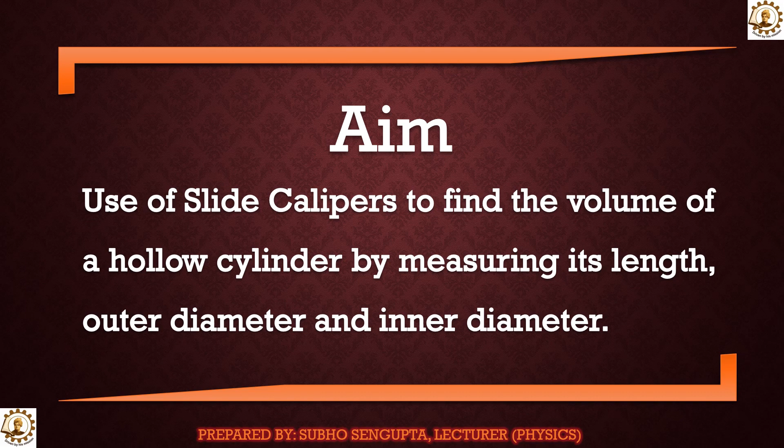First of all, let us discuss what is the aim of this experiment. In this experiment, we will use slide calipers or a vernier calipers to determine the volume of a given hollow cylinder by measuring its length, outer diameter and inner diameter. Before starting the experiment, first I will describe what is a slide calipers or a vernier calipers.

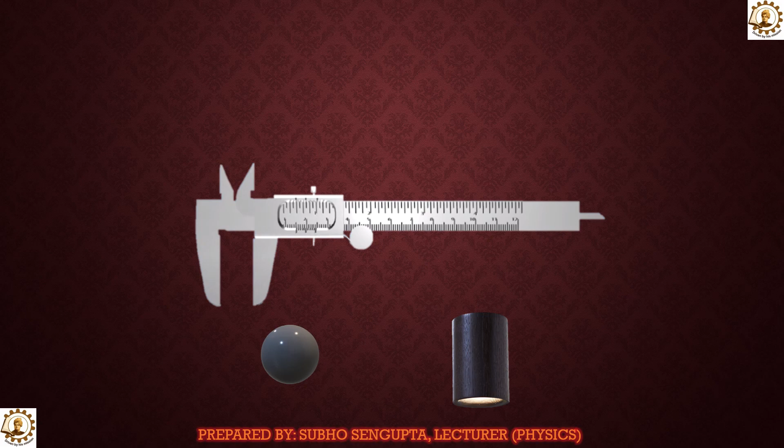Vernier calipers or slide calipers is an instrument which is commonly used in physics laboratories to measure small lengths such as diameter of a sphere, length of a cylinder, the outer diameter and the inner diameter of a cylinder, etc. accurately, which could not have been possible by using a meter scale.

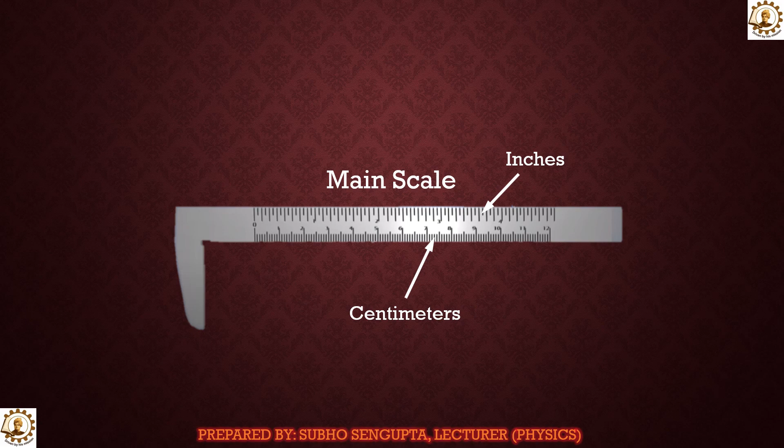A slide calipers or a vernier calipers consists of a long rectangular metal strip. This long rectangular metal strip has a fixed jaw at its one end. The metal strip has graduations on it. It is graduated in inches in its upper edge and in centimeters in its lower edge. This is known as the main scale of the vernier calipers or slide calipers.

There is a movable rectangular metal strip. This movable rectangular metal strip has also graduations on it. The graduations on the movable rectangular metal strip have a special relation with the graduations found on the main scale. This movable rectangular metal strip is known as the vernier scale. This vernier scale can slide over the long rectangular metal strip.

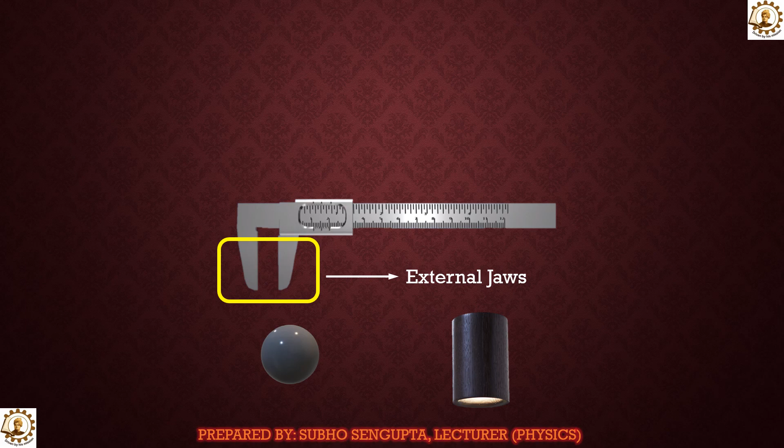This movable rectangular metal strip has a jaw similar to that of the main scale. These jaws together are used to hold objects like sphere, cylinder, etc. firmly while measuring their lengths, diameters, etc. These jaws are known as the external jaws or the lower jaws. These jaws are extended to the other side and are known as the upper jaws or the internal jaws. These jaws are generally used to measure the internal diameter of a hollow cylinder.

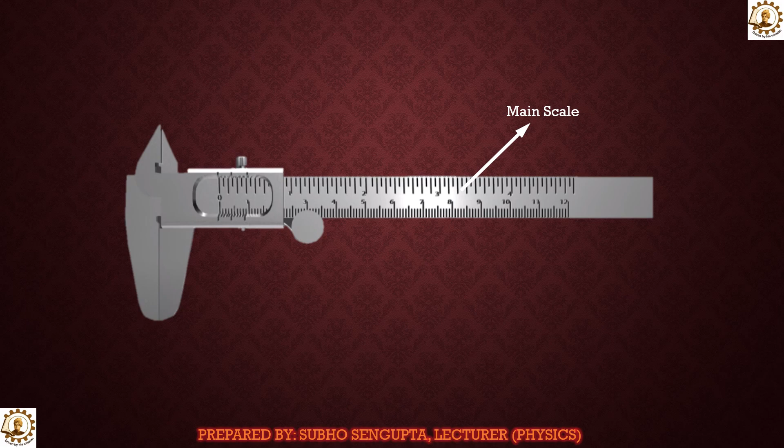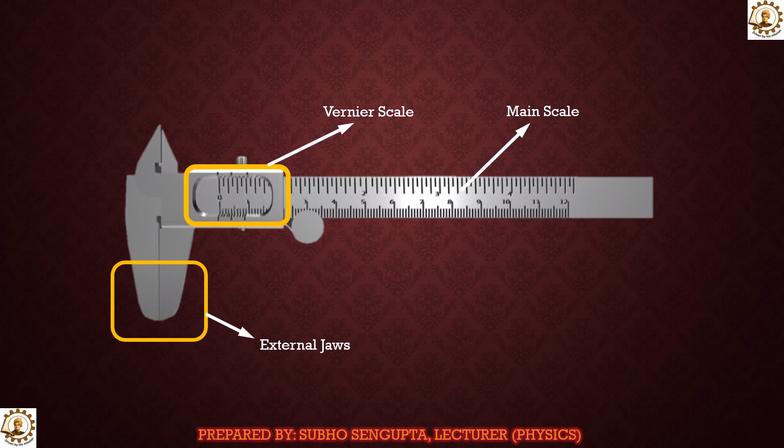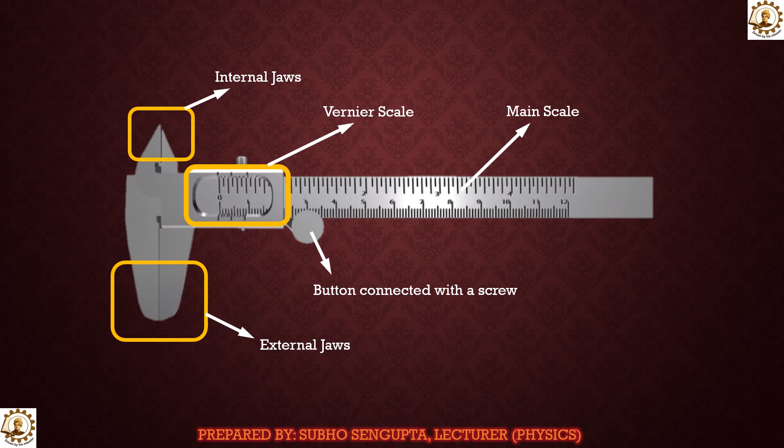So, the main parts of a vernier calipers or slide calipers are as follows. The main scale, it is graduated both in centimeters and in inches. Vernier scale, it is graduated with a special relation to that of the main scale. The external jaws or the lower jaws, the internal jaws or the upper jaws, and a button connected with a screw. By using this button, we can slide the vernier scale over the main scale of the vernier calipers or slide calipers.

Now we will discuss about the principle of a slide calipers or a vernier calipers. Remember, this instrument works on a simple principle known as the vernier principle. To discuss about the principle, first we need to determine the vernier constant or least count of the given slide calipers or vernier calipers. First, we will close the two external jaws of the slide calipers or vernier calipers by using that button.

When two external jaws of the given vernier calipers are closed, you will see that 0 of the main scale coincides with the 0 of the vernier scale. This means that when the two external jaws are closed, you will find that 10 divisions of the vernier scale are exactly equal to 9 divisions of the main scale. That is, n divisions of the vernier scale are equal to n minus 1 divisions of the main scale.

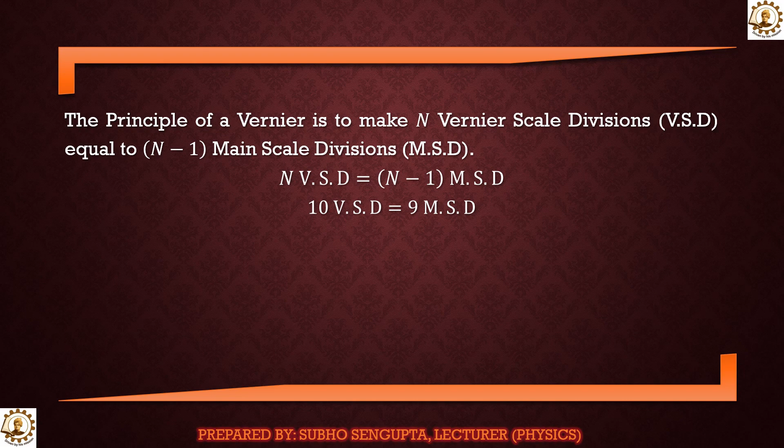The principle of a vernier is to make n vernier scale divisions or VSD equal to n minus 1 main scale divisions or MSD. Thus, n VSD = (n - 1) MSD. Here, capital N represents number of divisions. You know that there are 10 divisions on a vernier scale. Therefore, we can write 10 vernier scale divisions equal to 9 main scale divisions. Hence, 1 vernier scale division is equal to 9/10 main scale division, that is 0.9 main scale division.

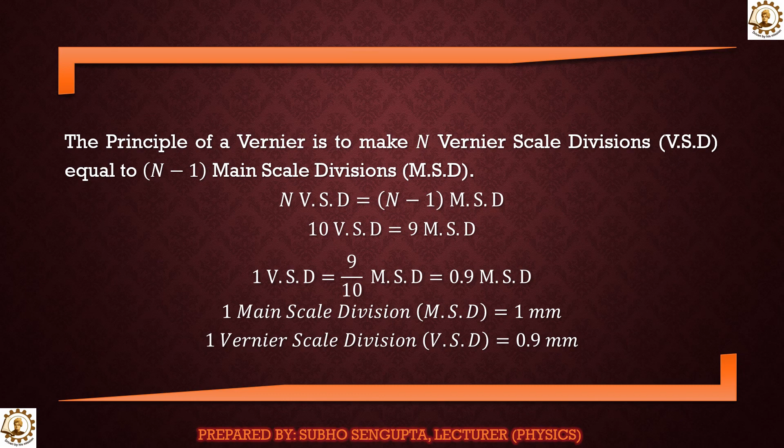Let us now consider our previous calculation. We found that one vernier scale division is equal to 0.9 main scale divisions. Now we know that one main scale division or MSD is equal to 1 millimeter. Hence, one vernier scale division or VSD should be exactly equal to 0.9 millimeters. Now we will define what is vernier constant or least count of a vernier calipers.

Remember, the smallest division that can be measured by the use of a vernier scale along with the main scale is known as the vernier constant or least count of the vernier calipers. Now, if we want to find out the value of vernier constant or least count, we need to find out the difference between one main scale division and one vernier scale division. This difference will be the vernier constant or least count of the vernier calipers. Therefore, vernier constant or least count = 1 MSD - 1 VSD.

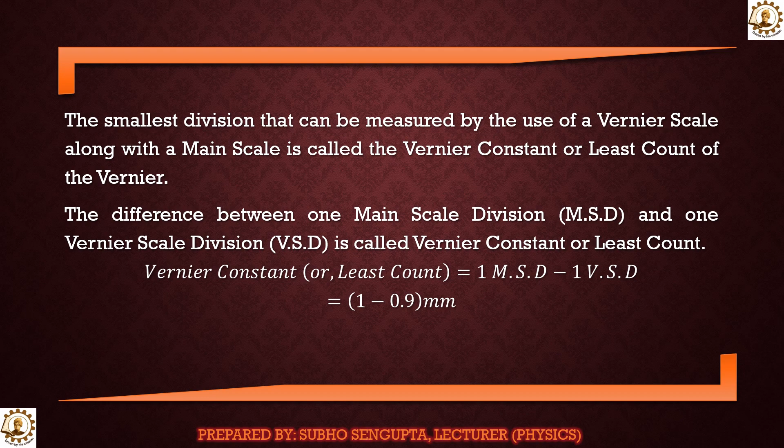We know that one main scale division is equal to 1 millimeter and one vernier scale division is equal to 0.9 millimeter. So, vernier constant or least count is equal to 1 - 0.9 millimeters, that is, it is equal to 0.1 millimeter. Now, if you divide 0.1 by 10, then the vernier constant or least count will become 0.01 centimeters.

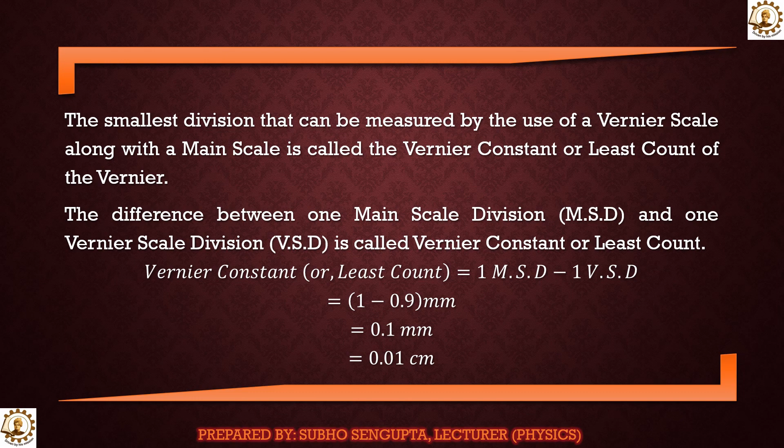Zero error. While calculating the vernier constant or least count, it was found that when the two external jaws of the vernier calipers were closed, zero of the main scale exactly coincided with the zero of the vernier scale. But there will be some situations when you will find that the zero of the main scale is not coinciding with the zero of the vernier scale, though the external jaws of the vernier calipers are closed. In those situations, you will have zero error.

Remember, we can classify zero error into two categories: one, positive zero error, two, negative zero error. Remember, zero error occurs in the instrument due to excessive wear and tear and also due to the manufacturing defect. In those situations, zero of the vernier scale does not coincide with zero of the main scale. It is either right or left of the zero of the main scale.

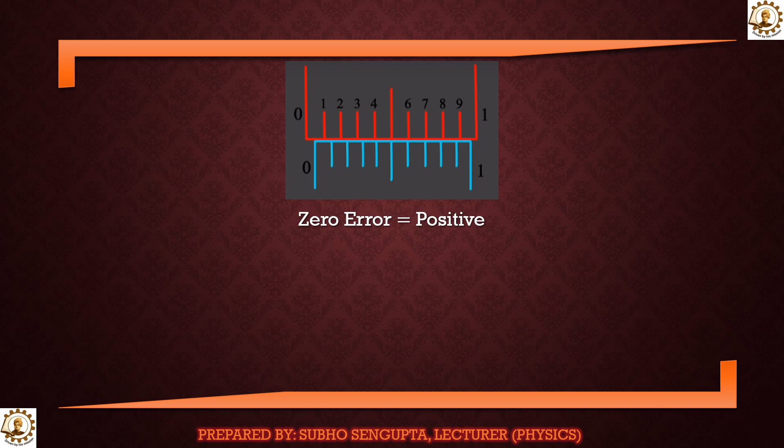First, we will consider zero of the vernier scale is right of the zero of the main scale. Here, though the two external jaws of the vernier calipers are closed, still it is measuring some extra length. That is, the vernier calipers is providing some extra reading. So we need to subtract this extra reading from the total reading when we use the vernier calipers. Remember, when zero of the vernier scale is right of the zero of the main scale, the zero error will be taken as positive and the zero correction will be negative.

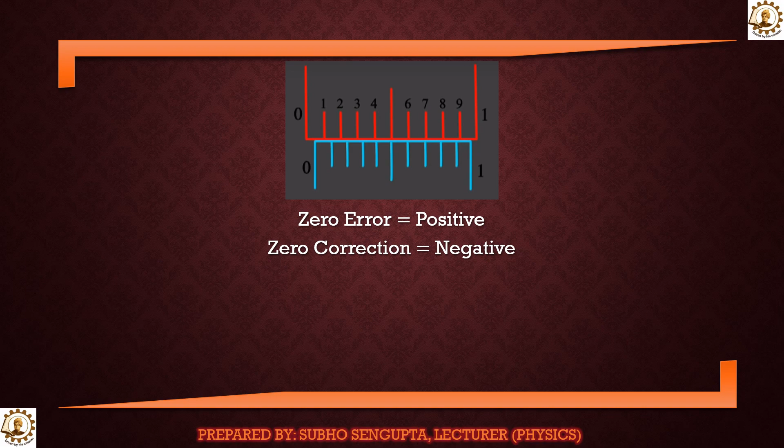Now, zero error can be calculated from the following equation, where zero error is equal to main scale reading plus vernier constant into vernier coincidence. Now, we need to know what is vernier coincidence. Since 0 of the vernier scale is not coinciding with 0 of the main scale, you will find that one of the divisions of the vernier scale will exactly coincide with one of the divisions of the main scale. We need to find out which division of the vernier scale is exactly coinciding with any of the divisions of the main scale. You need not consider with which division of the main scale that vernier division is coinciding. You need to only consider which division of the vernier scale apart from 0 is exactly coinciding with any of the divisions of the main scale.

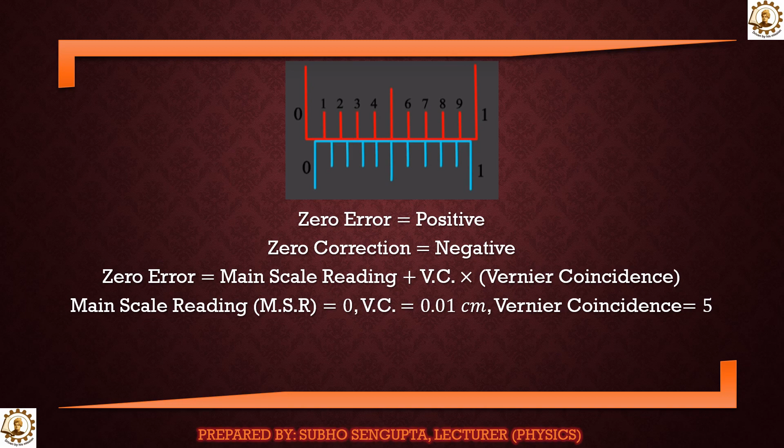From this figure, we find that main scale reading is 0. We know that vernier constant is 0.01 centimeter, and here the fifth division of the vernier scale is coinciding with one division of the main scale. Hence, the vernier coincidence for this particular diagram is equal to 5. Now, if we substitute all these values in the equation of zero error, we will find that zero error is equal to 0 plus 0.01 into 5, which is equal to plus 0.05 centimeter. So, zero error is equal to positive 0.05 centimeter. So, we need to subtract this extra reading from the total reading. Hence, zero correction for this particular case is equal to negative 0.05 centimeter.

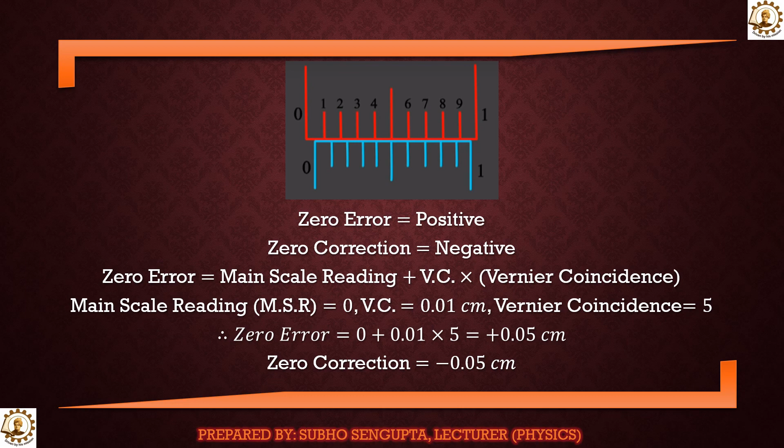Now, we will consider a situation where 0 of the vernier scale is left of the 0 of the main scale when the two external jaws of the vernier calipers are closed. In this situation, the instrument is measuring a certain less amount of reading than the original one. So, we need to add this amount of less reading to the total reading to get the actual reading. So, remember, when 0 of the vernier scale is left of the 0 of the main scale, the zero error will be negative and the corresponding zero correction is positive. Now, when the zero error is negative, the calculation is slightly different with respect to the calculation we have done when we calculated the positive zero error.

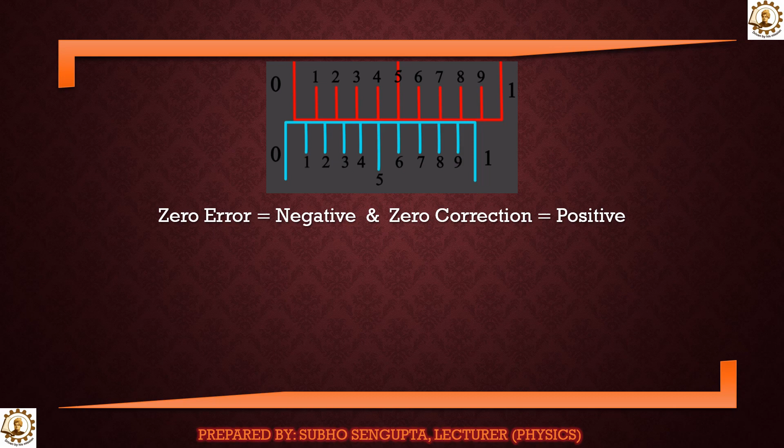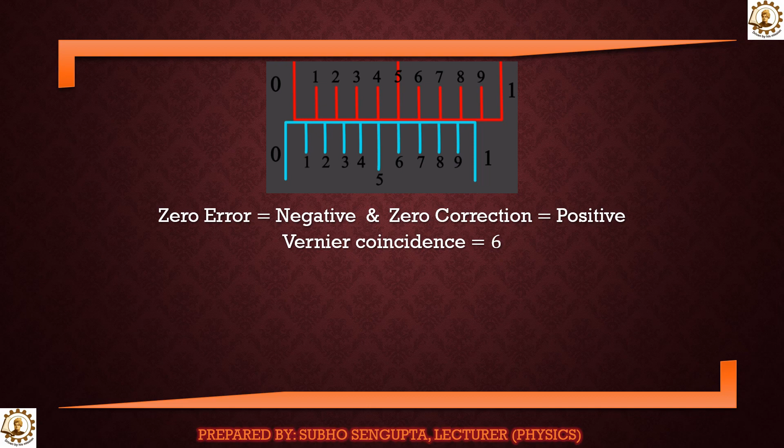Here again, we will find out which division of the vernier scale is coinciding with any of the divisions of the main scale. From the figure, you can see that the sixth division of the vernier scale is exactly coinciding with one of the divisions of the main scale. So, for this particular diagram, the vernier coincidence is equal to 6. Now, we will calculate the number of divisions for zero error. It can be calculated by subtracting this vernier coincidence from the total number of vernier divisions. So, number of divisions for zero error is equal to total vernier divisions minus vernier coincidence. We know that there are 10 divisions on the vernier scale, and from this figure the vernier coincidence is equal to 6. Therefore, number of divisions for zero error is equal to 10 minus 6, which is equal to 4.

Therefore, zero error is equal to negative of number of divisions for zero error multiplied by vernier constant. We know that number of divisions for zero error is 4 and the vernier constant is 0.01 centimeter. Hence, the zero error becomes negative of 4 into 0.01, that is, zero error is equal to negative 0.04 centimeter. Therefore, the zero correction is equal to positive 0.04 centimeter. So, we need to add 0.04 centimeter to the total reading to get the actual reading when we use the vernier calipers.

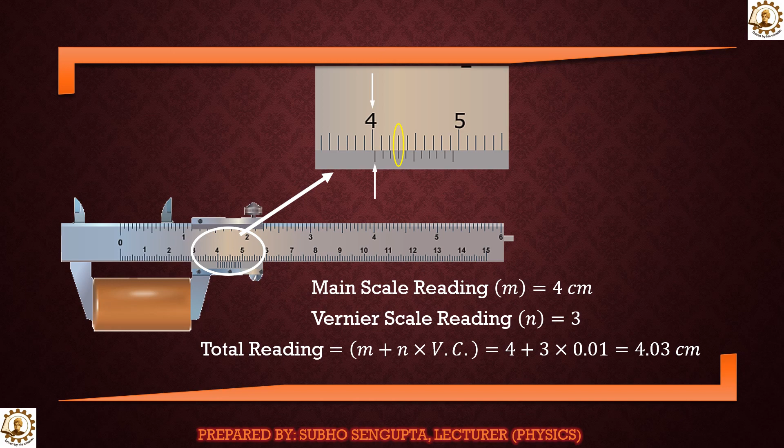Next, we will measure the outer diameter of the hollow cylinder. To measure the outer diameter of the hollow cylinder, the cylinder is placed vertically between the two external jaws of the vernier calipers or slide calipers. Remember, the two jaws are again pressed firmly so that the cylinder is placed very tightly between the two external jaws.

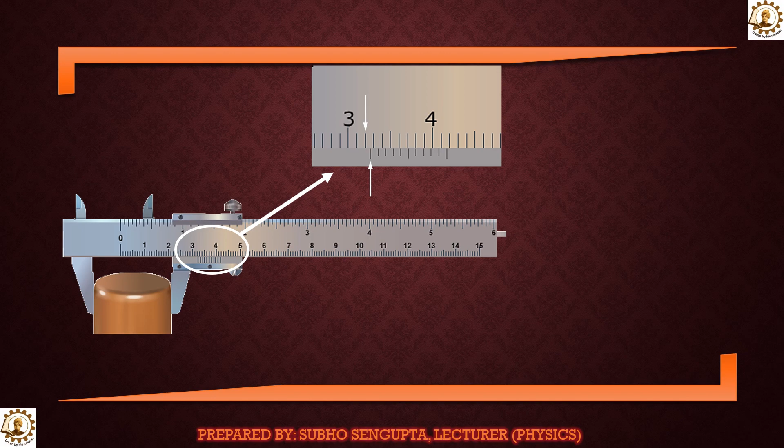Now let us consider the reading part. From the figure, you will find that again the zero of the vernier scale is not coinciding with any of the main scale divisions. According to the figure, zero of the vernier scale is right of the 3.2 centimeter mark on the main scale. Therefore, main scale reading for this part is equal to 3.2 centimeter.

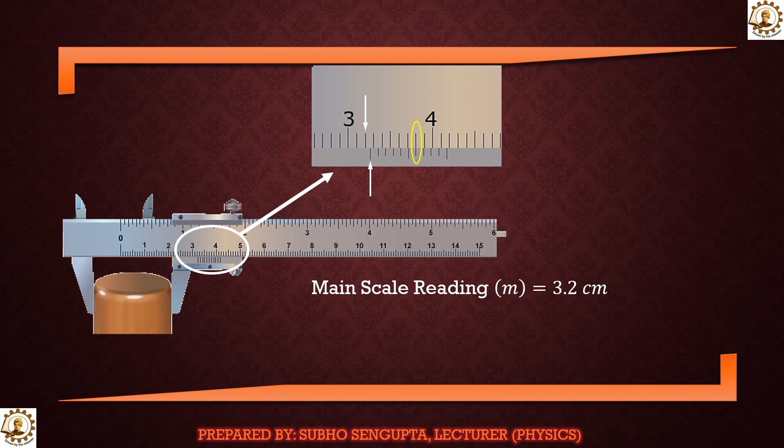Now, we will find out which division of the vernier scale is exactly coinciding with any of the divisions of the main scale. From the figure, you will find that the sixth division of the vernier scale is exactly coinciding with one division of the main scale. Therefore, vernier scale reading is equal to 6.

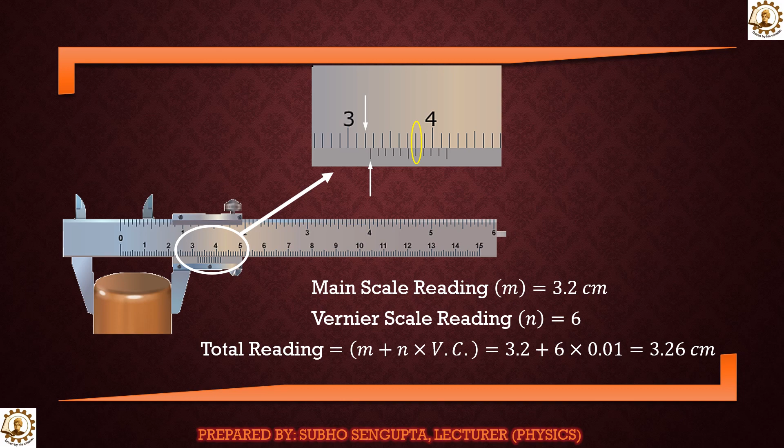Hence, total reading is equal to again main scale reading plus vernier scale reading multiplied by vernier constant. Therefore, total reading is equal to 3.2 plus 6 into 0.01 centimeters. Therefore, total reading is equal to 3.26 centimeters.

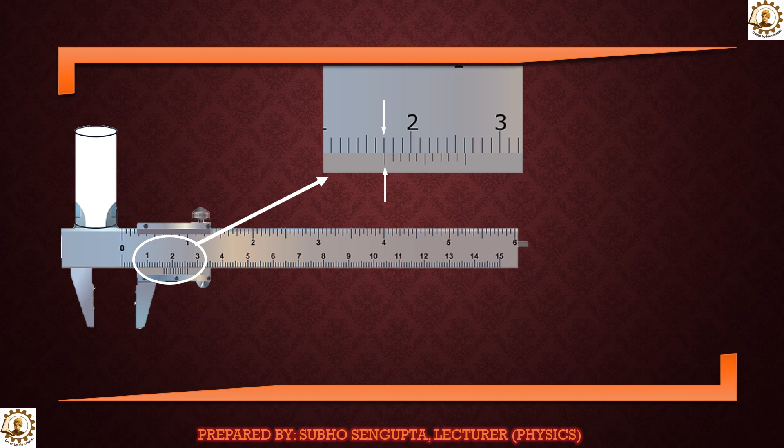From the figure, you will again find out that the zero of the vernier scale is not coinciding with any division of the main scale. From the figure, it has been found that the zero of the vernier scale is right of the 1.7 centimeter mark on the main scale. Therefore, the main scale reading for the inner diameter part is equal to 1.7 centimeters.

Now, we will again find out which division of the vernier scale is exactly coinciding with any of the divisions of the main scale. From the figure, we find that the first division of the vernier scale is exactly coinciding with one mark of the main scale. Therefore, vernier scale reading is equal to 1.

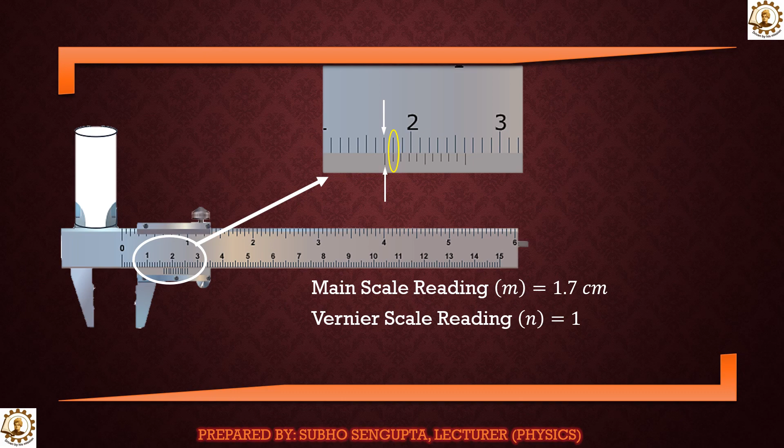Hence, total reading is equal to main scale reading plus vernier scale reading multiplied by vernier constant. So in this case, total reading is equal to 1.7 plus 1 into 0.01 centimeters. Therefore, total reading is equal to 1.71 centimeters.

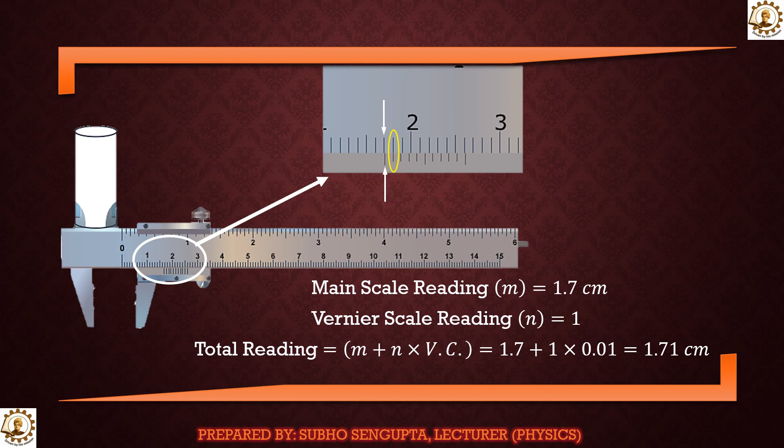Now, the final calculation to determine the volume of the given hollow cylinder. From our previous measurements, we found that the length of the cylinder, denoted by capital L, is equal to 4.03 centimeters, the outer diameter of the cylinder, denoted by capital D2, is equal to 3.26 centimeters, and the inner diameter of the cylinder, denoted by capital D1, is equal to